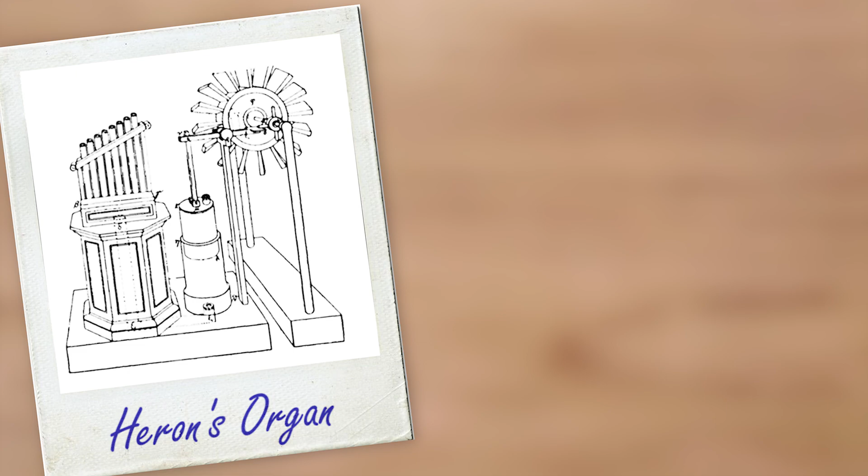Humans have been harnessing the power of the wind for thousands of years. The first recorded instance dates back to the 1st century CE, with the engineer Heron of Alexandria's wind-powered organ. The Persians made the first wind-powered mills, using a vertical axis design, as early as the 7th century CE. Windmills then spread throughout Europe from the 12th up to the 19th centuries, eventually being superseded by steam power. However, these designs were all inefficient at extracting power from flow.

Aeronautical science advanced greatly in the 20th century, and from 1973 onwards, NASA's wind turbine project created a set of experimental turbines that paved the way for modern turbines.

Wind turbines today play an important part in reducing our dependence on fossil fuels and mitigating the effects of climate change, and the UK is at the forefront of this, with the largest offshore wind power installations in the world. In 2018, the UK also went a record 55 continuous hours without coal since the Industrial Revolution, as a result of installed wind power capacity.

We're a group of 6 second-year aeronautical engineering students at Imperial College London, and for our applications exercise this year, we were tasked with creating a wind turbine to be tested at 4 different wind speeds, ranging from 6 to 12 meters per second. There were several design specifications that needed to be met.

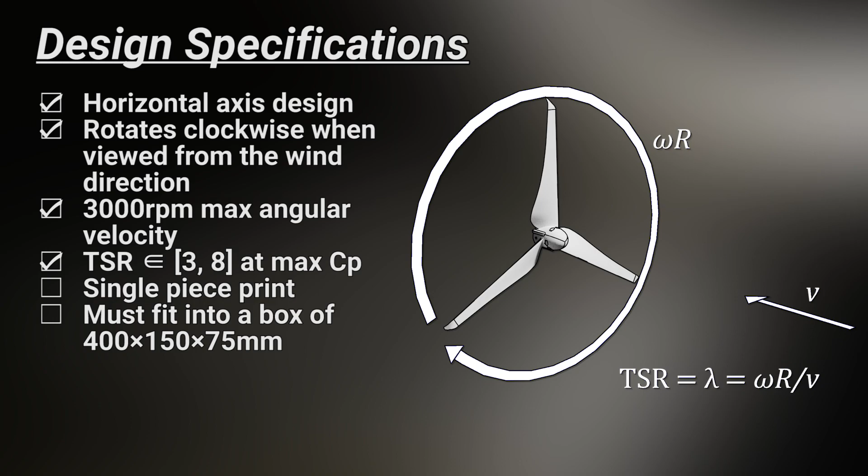The tip speed ratio, or TSR, which is the ratio of blade tip speed to wind speed, needed to be between 3 and 8 when our power coefficient CP is at a maximum. This is the ratio of power delivered to the turbine to total power available in the flow, which in theory has a max value of 0.593, known as the Betz limit.

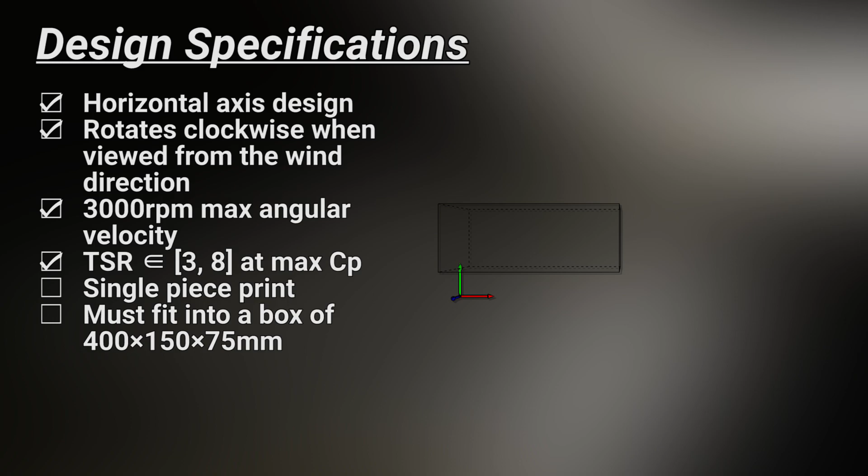However, the most important one was that the wind turbine needed to be printed in one piece into a box of 400 by 150 by 75 millimeters.

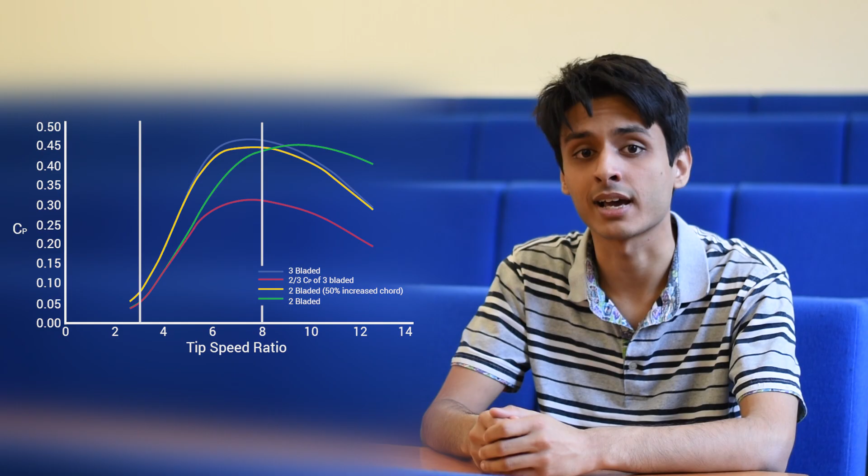The first thing we had to do was decide on the number of blades. There was very little time for design considerations, so we had to make sure we chose a reasonable design and committed to it. We ended up choosing 3 blades since it has a high ceiling for coefficient of power in the limited range of TSR that a turbine has to operate in. 3-bladed wind turbines also have the distinct advantage that the blades don't experience symmetric forces, which mitigates against resonance and therefore rapid unscheduled disassembly of our wind turbine.

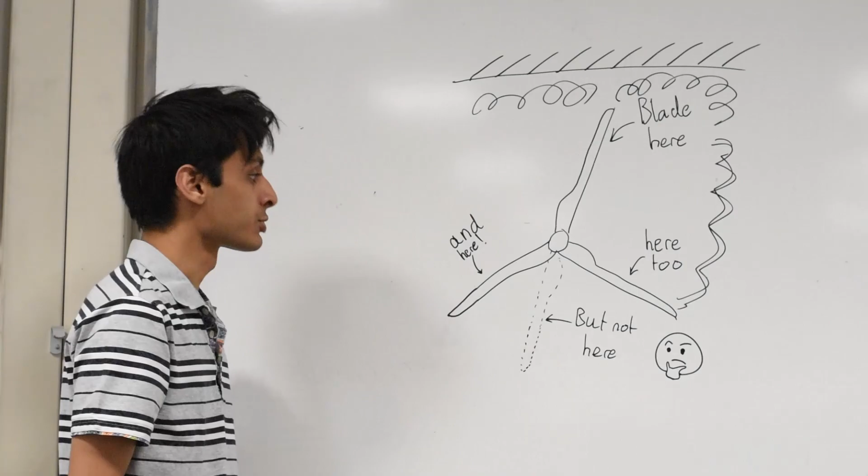We also chose a small diameter of 250mm, with the idea that recirculating airflow would cause drag in the blade's most important section, its tip.

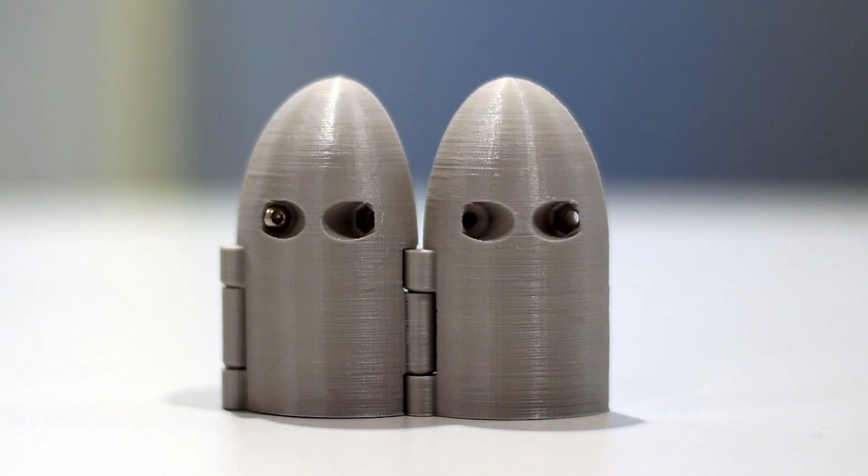Our first challenge was to design a turbine that could be printed in a one-piece configuration, yet still be 3-bladed and of an appropriate diameter. Our solution was to incorporate a semi-concealed hinge into the nose cone, splitting it into thirds, each third having one blade, that would eventually secure together with bolts. The hinges were designed to have alternating male and female ends either side of the nose cone thirds, and these were designed to be printed in an assembled configuration as one piece.

Ideally, a successful design means the turbine's actual performance will be very close to its design point. Thus, the TSR at maximum power had to be predicted as accurately as possible. We used blade element momentum theory to calculate the thrust and power for different settings of wind speed, rotation speed, and pitch angle, allowing us to simulate the turbine's performance and estimate the design point.

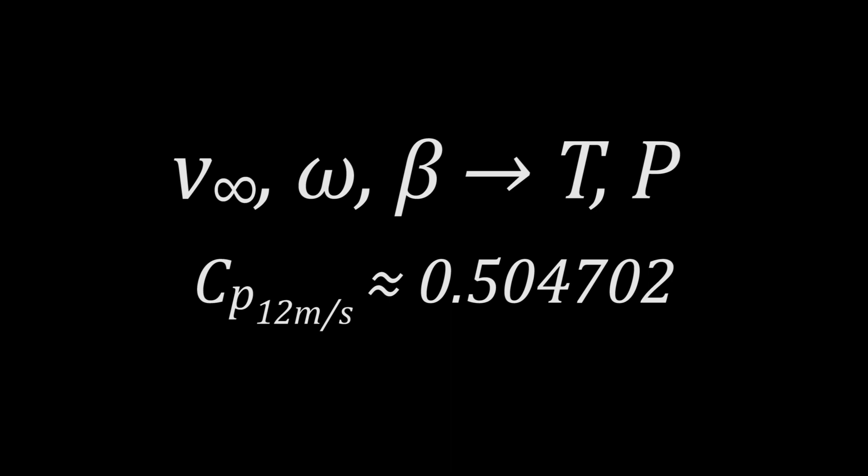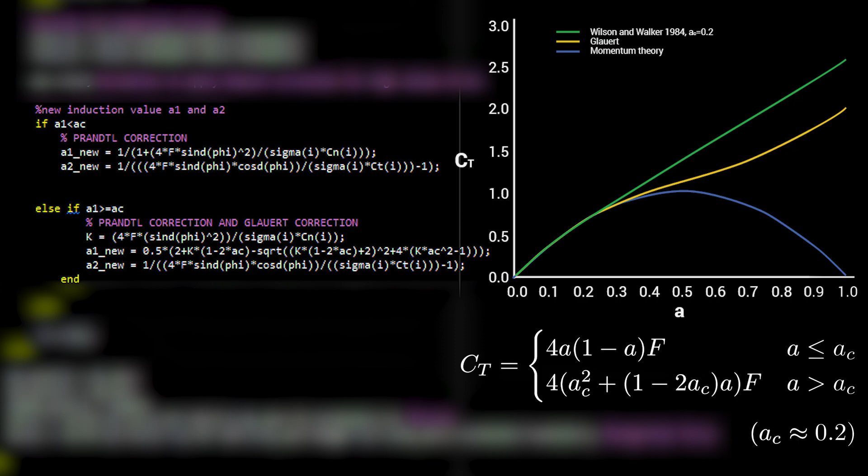The standard 1D momentum analysis presents some oversimplification of the flow behavior, but these were mitigated by applying 2 correction factors. The Prandtl tip loss factor corrected the assumption of an infinite number of blades, and the Glauert correction dictated an empirical and more realistic relation between the thrust and the actual flow induced by the rotating wake. Everything was implemented in MATLAB code, and the final TSR of 4.5 was decided.

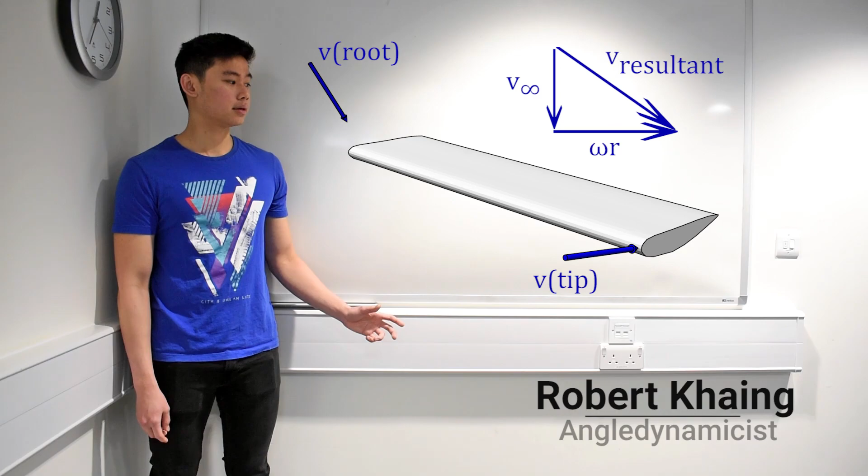As you move from the root of the blade to the tip, the local blade speed increases. However, the incoming wind speed is constant throughout the blade, so the blade needs to be twisted in order to vary the local angle of attack. The angle of attack decreases to ensure that stalling does not occur at the tip.

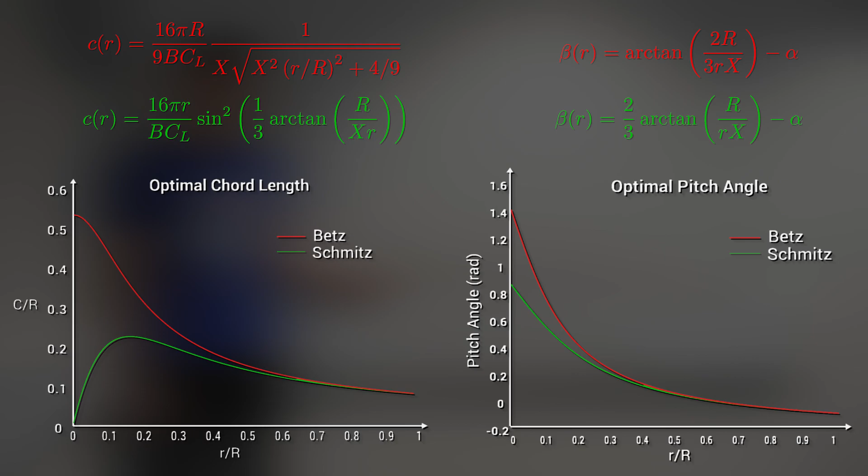We compared the Betz and Schmitz formula for determining the optimal pitch and chord angles along the blade by plotting graphs using MATLAB. Even though the 2 graphs are very similar at the tip of the blade, we decided to use the Schmitz formula as it uses a more rigorous proof. It uses the conservation of angular momentum, where the torque in the shaft is generated by the vorticity of the wake.

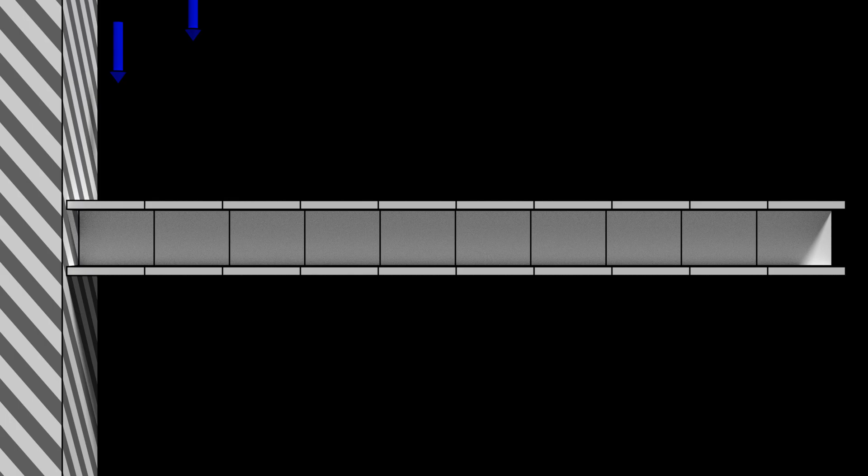After taking this data, we then needed to evaluate if the turbine would be able to handle the structural loads imposed on it. With an increased number of blades, achieving the optimal blade area requires that the thickness must decrease.

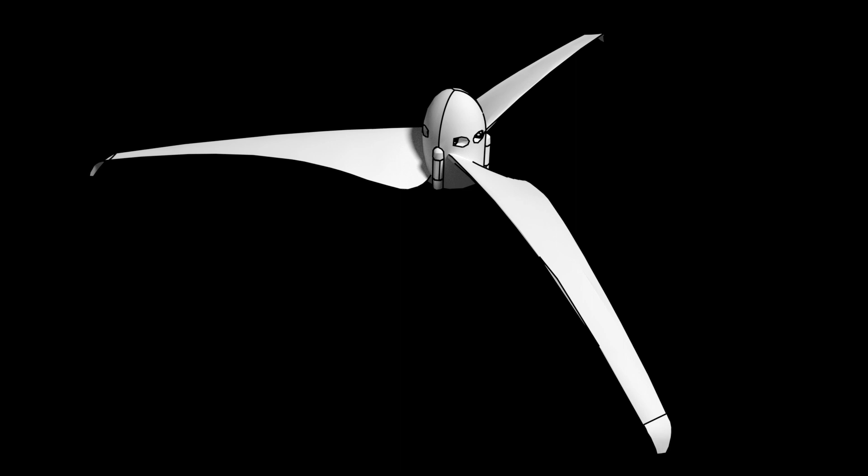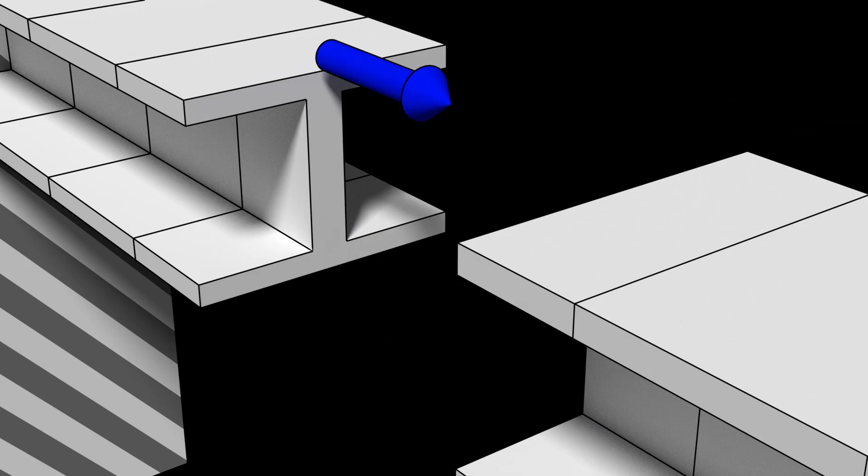If unaccounted for, this pursuit of maximum aerodynamic efficiency could not only lead to a structurally compromised blade, but one with excessive deflections that would break some of the fundamental assumptions we use to analyze its aerodynamic properties. For this reason, we wrote code based on simple bending theory from first year, extended for continually varying area and second moments of area. The results show the tip deflection under maximum load is 8mm, and the peak stress is well below the failure stress for ABS plastic.

The next step was to choose which airfoil to use. We chose those for small wind turbines only. These airfoils were imported into Q-Blade for further analysis on CL versus angle of attack and maximum lift-over-drag. The SG6043 was chosen at the tip of the blade because of its high CL and highest maximum lift-to-drag ratio of all the airfoils we could choose from.

The SG6040 was chosen at the root because of its higher thickness-to-chord ratio, which gives a better stall characteristic and a stronger structure. The wind turbine was then simulated in Q-Blade to check against our calculations.

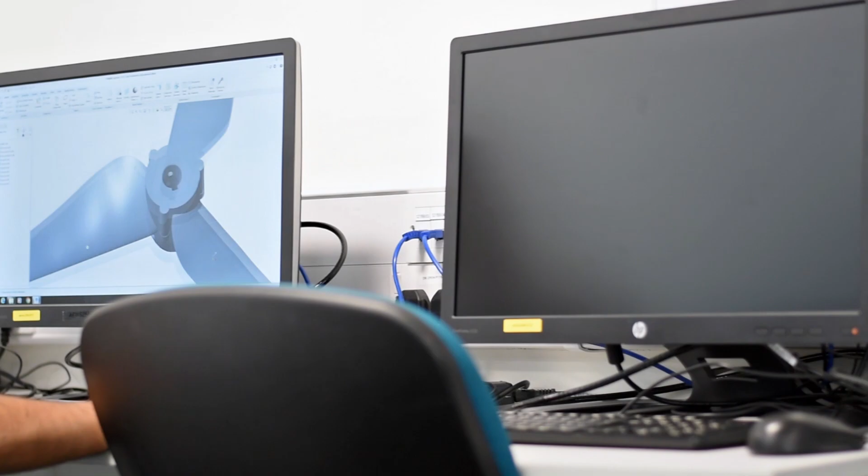Creo was then used to CAD up our design. The blades were produced by blending 20 sections of linearly interpolated airfoils, chords, and twist angles produced by a MATLAB script. The first question that came up when designing the blade tips was whether or not we should add a winglet.

After reading a few papers, it became clear that at low speeds, a winglet would bring about a 2 to 3% increase in power, meaning our turbine would get more bang for the same buck. As the margins between each team will be very small, a 2 to 3% increase in power could be crucial in gaining marks for performance.

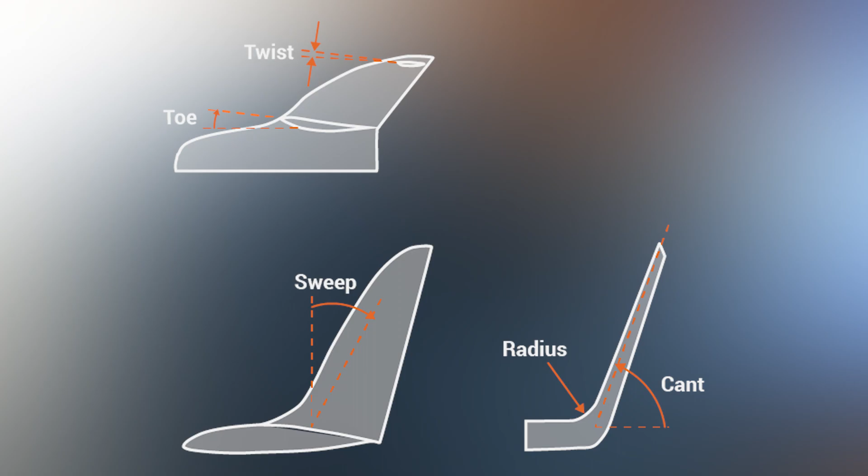After finally deciding to add a winglet, the next challenge became its design: the twist, toe, sweep, and cant. For simplicity and to reduce time spent on Creo, the twist and toe were set to 0 degrees. For the sweep and cant, most papers agreed on 45 degrees for both, with the cant angle positive in the downstream direction. To the winglet, we added a central section which curves like a falcon's wing, which also flies at similar Reynolds numbers to our blade tip.

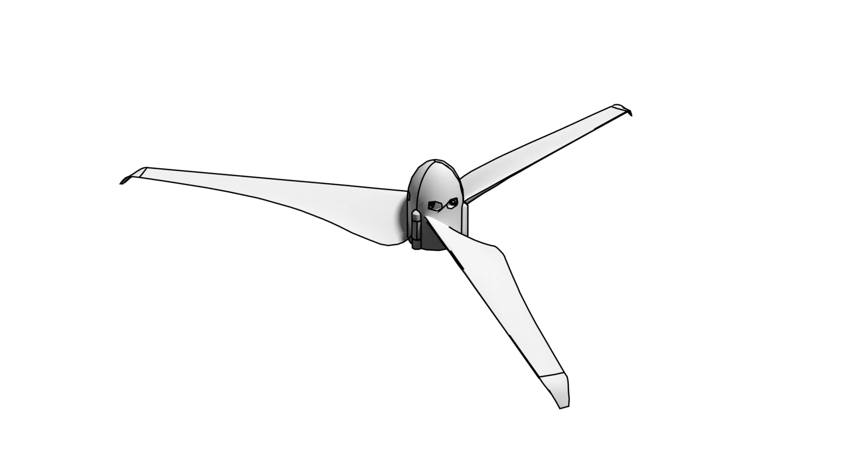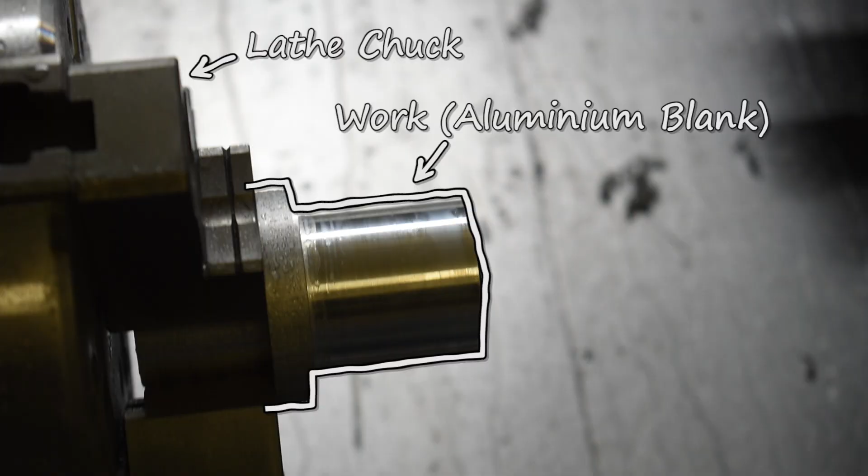The first step in manufacturing was to make our hub. An aluminium blank was loaded into the CNC lathe. The blank was then roughed out to diameter and an end mill was used to create the interior hole in the hub, instructed by G-code entered into the machine. You can also see the cutting fluid running through the end mill, used for lubrication and cooling.

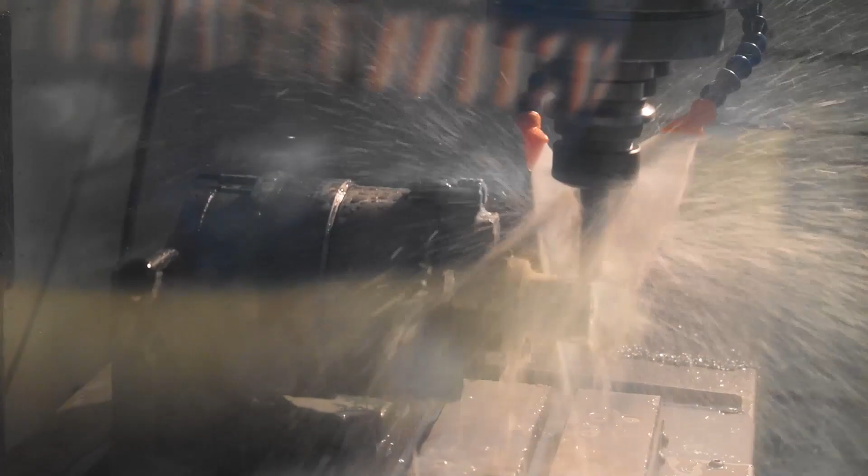Next, the blank was loaded into a CNC mill, and an end mill was used to create the flats on the hub 60 degrees apart. The M5 hole for the set screw was then drilled and tapped.

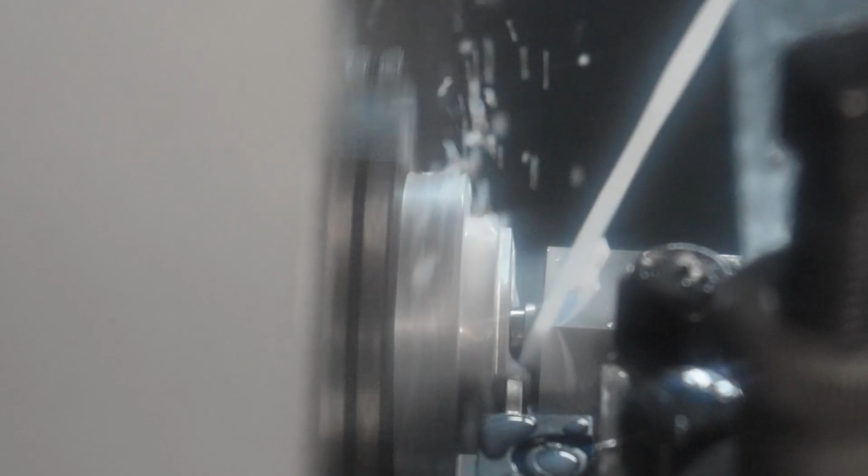The hub was then cut free from the blank using a separate lathe. The edges were deburred to remove any sharp edges left over from the machining processes. Finally, the keyway was broached into the hub using a hydraulic press, and our hub was complete.

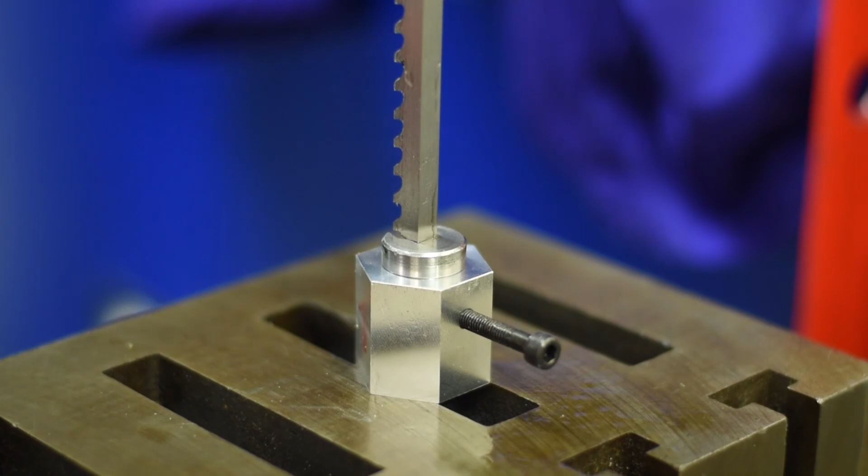We then received our turbine from the 3D printer. Unfortunately, the face-to-face tolerance on our hinge was barely too small at 0.2mm, so one of the hinges broke off. Fortunately, we were able to glue it back together later.

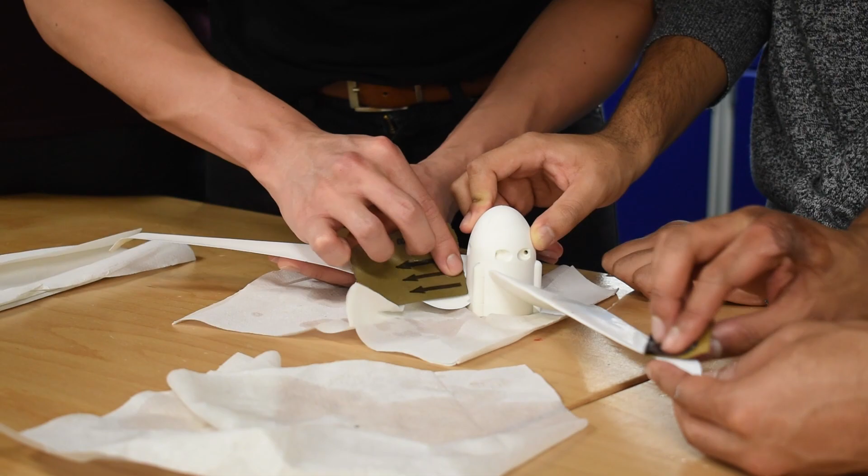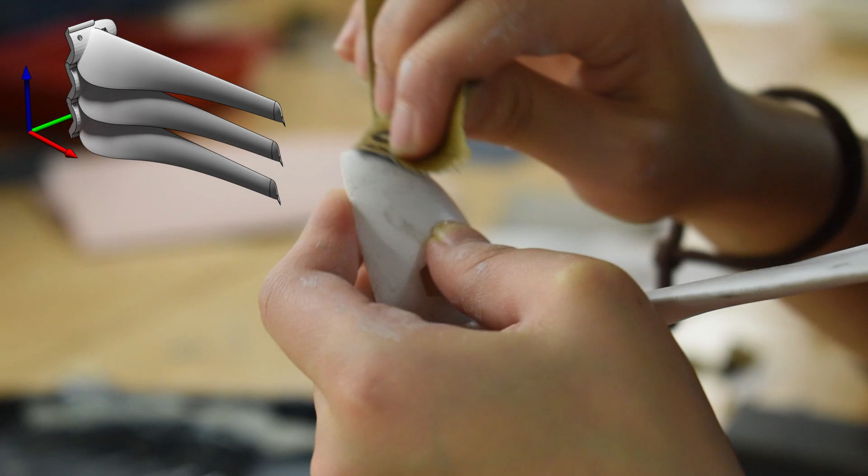We then sanded our turbine down to remove 3D printing layer lines. Water, along with sandpaper of increasing grit, was used since we could have more control than with acetone smoothing. Because our layer lines ran longitudinal to our blades, minimal sanding was needed. Finally, the turbine was glued together, with the excess sanded and filed off. The hardware was then inserted and our manufacturing was complete.

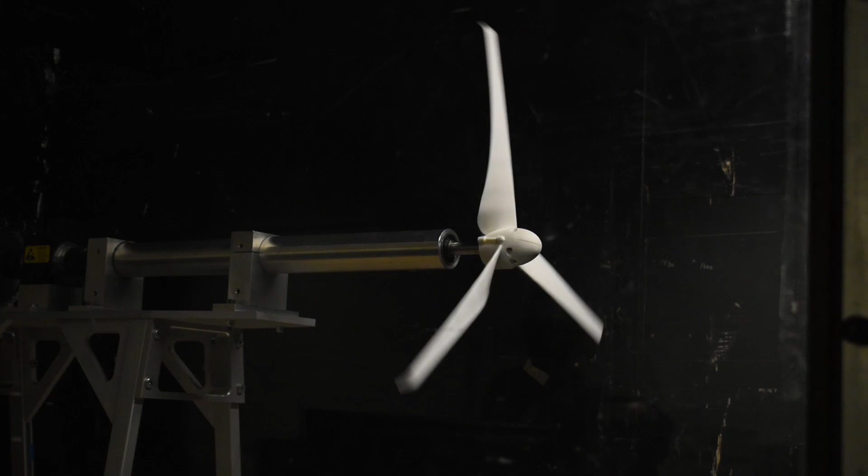Finally comes the time to test our turbine. The testing took place at the Donald Campbell Tunnel. The wind speed would gradually increase and measurements were taken at speeds of 6, 8, 10, and 12 meters per second. The turbine didn't self-start, but after a slight kick it went into steady rotation, successfully maintaining both structural integrity and steady power production. No instabilities or resonance was observed, although a slight buzz could be heard at about 11 meters per second.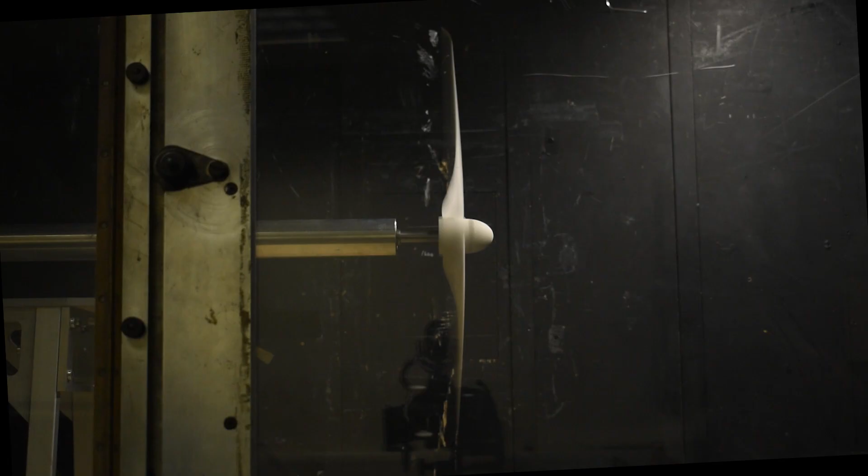The turbine wings can be seen deflecting a little bit backwards towards the tips. Maximum power is generated at an RPM of 2400 and a wind speed of 12 meters per second. A TSR of 5.5 was obtained, corresponding to a CP max of 0.41.

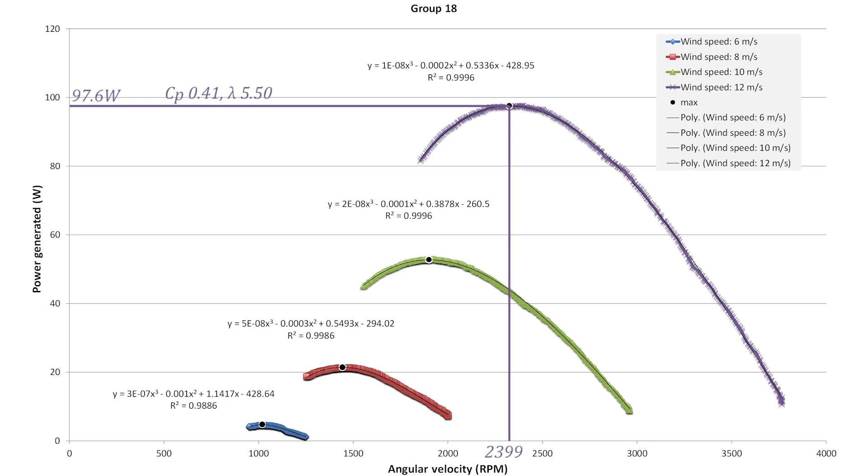This was fairly away from the design point, but this could be attributed to the blockage effect, as 14.2% of the tunnel area was covered by the turbine, leading to higher effective incoming wind speed. For normal wind tunnel testing, a guideline of 2% tunnel area is used.

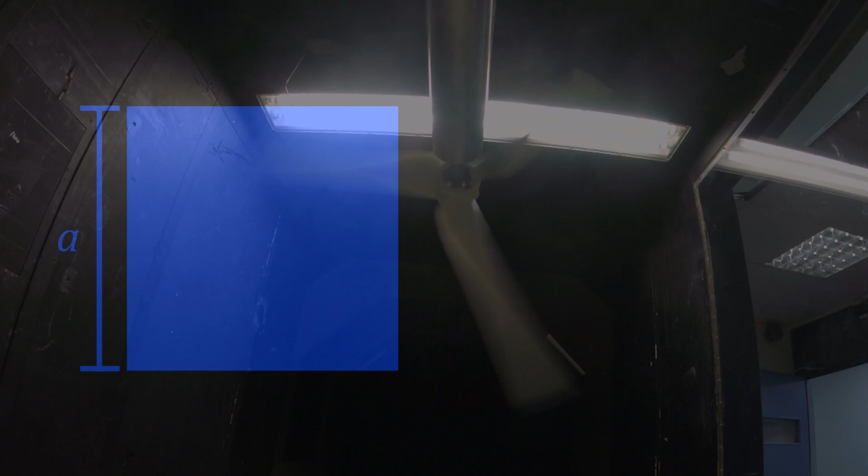Overall, the turbine did not fail and produced a satisfying CP, meaning our application exercise was successful. All manufacturing requirements were met, and the advantages of 3D printing and ABS plastic were greatly exploited. As for the winglets, unfortunately, due to a lack of time, we did not have time to redo the testing with the winglets cut off in order to assess their contribution to overall performance.

The turbine did not self-start. However, this could be achieved by increasing the twist at the root or adding paddles at the tip, although this would add drag and compromise its performance in the design regime.